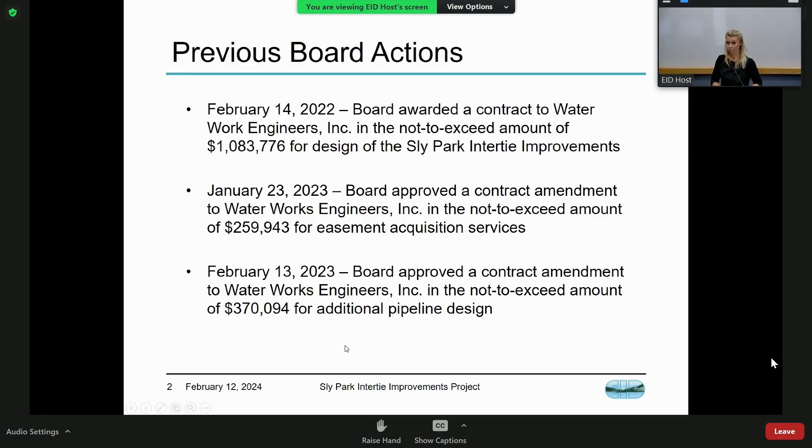Next slide. In April of last year, the board approved another contract amendment for additional geotechnical investigations as well as topographic surveys. The reason for this amendment was initially we were hoping to go right in the exact same trench, replace exactly where it was. Unfortunately, we had to modify the pipe alignment slightly, so those services were needed to facilitate the design.

And then in October of last year, the board adopted the capital improvement plan, which included this project. Summary of issues: we are getting close to the end of design for this project, about 95%, so we just have a little way to go. Additional engineering services are needed to get to those final stages. Also, staff is requesting additional funding for easement acquisitions as well as capitalized labor to finalize the design and carry the project into bidding.

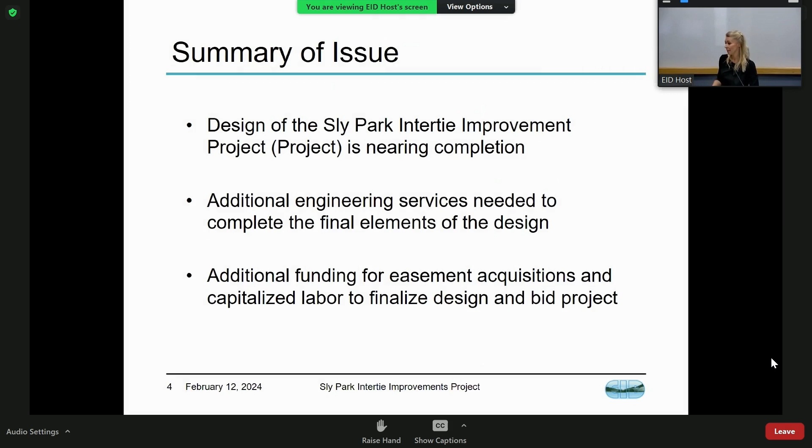Next slide, background - this is a refresher for most of you. Sly Park Intertie was originally constructed in 1978 to alleviate water shortages from the 70s drought. Initially, that steel pipeline was installed from Reservoir 1 to Reservoir A, and then the pump station was constructed in '93 in response to the Cleveland fire so we could put water from Res A up to Res 1, creating that bidirectional flow. Unfortunately, due to the emergency nature of the pipe construction, this is non-standard pipe, and it had to be taken out of service about 10 years ago due to leaks and pipe failures.

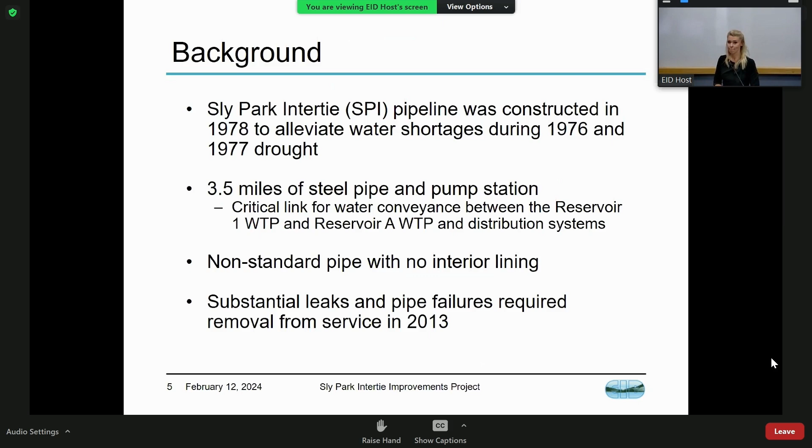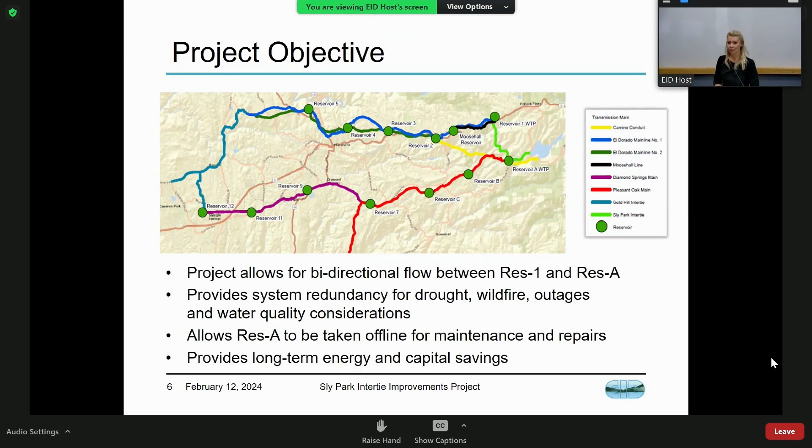The overall project objective is to reinstate bidirectional flow between our two reservoirs, Reservoir 1 and Reservoir A. This pipeline will provide system redundancies for drought, wildfire such as Caldor Fire, outages, and water quality considerations. This also allows Reservoir A to be taken offline for maintenance and repairs, which unfortunately we don't quite have right now. This also provides long-term energy and capital savings.

This screenshot is just an overall view of our pipe alignment. Above Highway 50, we start at Pony Express. That was the additional... excuse me? Oh, perfect. Great, thank you Jennifer.

The pipeline starts on Pony Express, north of Highway 50, comes along underneath the highway, traverses over 24 properties cross-country, over a few grade changes, I'll just put it that way, continues on to Reservoir A, and then we also have a slight leg down at the bottom. That's the slip lining for Sly Park Hills.

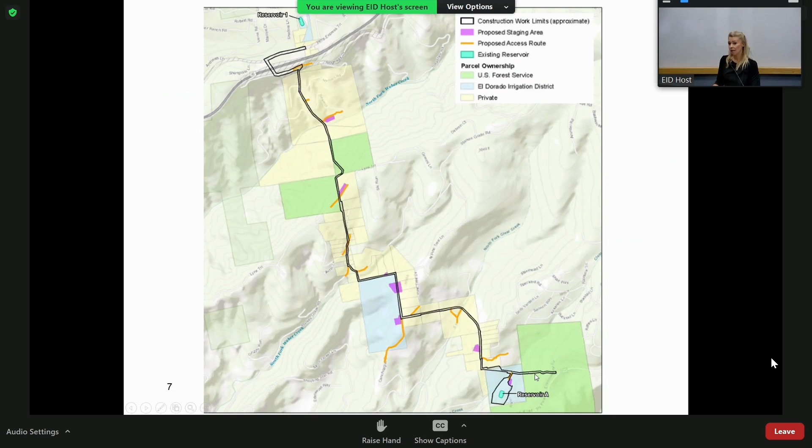Staff is requesting a contract amendment for additional engineering services. Some of those services include thrust block design. We typically have our standard thrust block design, and it takes quite a bit of footprint. Unfortunately, with the terrain and our easements, we'll need to do some specialty thrust block design to accommodate those space considerations. Also, we'll need a second Caltrans encroachment permit.

The initial alignment had a more direct shot underneath the highway. During design, we looked at potentially reinstating that, but it's not underneath any roadway or anything that we can maintain, so we decided to loop around and go under Ridgeway Drive. So we'll need a second encroachment permit so that we can properly abandon the existing pipeline.

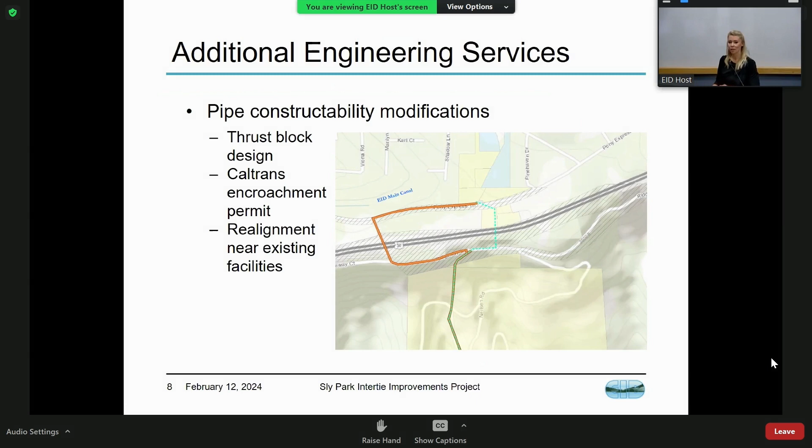Also, we did need to realign the pipeline in consideration of existing facilities. We do have some septic leach lines that we want to make sure we have proper clearance from. We'll have some modifications, called out in the presentation, about how the traditional method won't work, so we need to redesign those.

Can you explain that a little bit? Yeah, absolutely. So the pipeline itself is restrained. We do have excessive pressures and excessive grade changes. As a district, we typically have a more belt-and-suspenders way of designing our pipelines, and we have restraints as well as thrust blocks to make sure we don't have any unfortunate incidents in the field.

Our typical thrust block design is pretty much a large chunk of concrete that pushes against the soil so that if there's any pushing and pulling against those gaskets, it'll stop right there at that concrete block. We just don't have the space with the elevation and the easements to accommodate that large footprint of concrete block, about the size of a small vehicle. So we'll need to do some specialty design with steel reinforcement to try to get that same thrust constraint, but in a smaller footprint.

Alright, we'll also have some modifications at Reservoir A. Right now we have auxiliary fuel tanks for our existing generators, and we want that same functionality here. Unfortunately, this is a facility that we have power outages as well as pretty intense winter storms, so that emergency fuel storage will give us about 3 days of operation at the pump station.

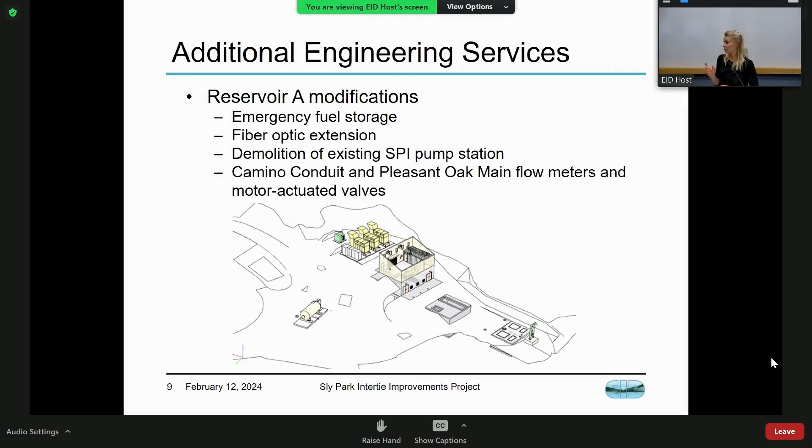Also, we will be extending the fiber optic line from the existing Sly Park Intertie pump station to the new location. We'll be demolishing the existing SPI pump station, giving us the ability to repurpose that building, so might as well take advantage of the facilities we have. Also adding flow meters and motor actuated valves to the Camino conduit and Pleasant Oak Main. This will help with our water reporting and water loss, to refine our numbers leaving Reservoir A.

And lastly, engineering services - we are looking to pre-purchase some of the long lead time items: generators, MCCs, motor control, as well as programmable logic control equipment.

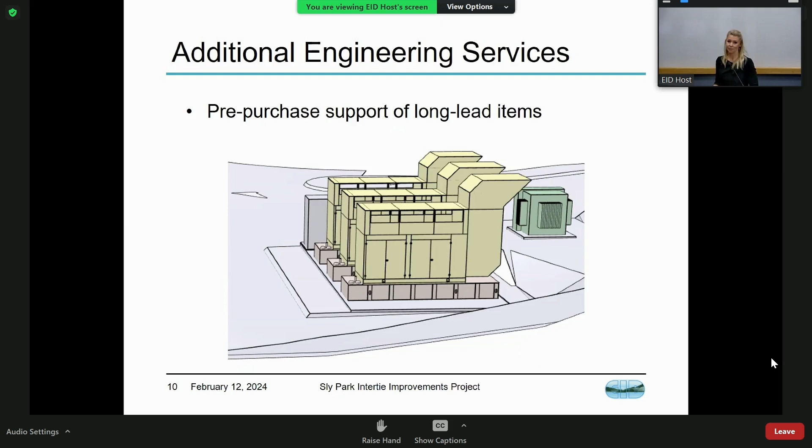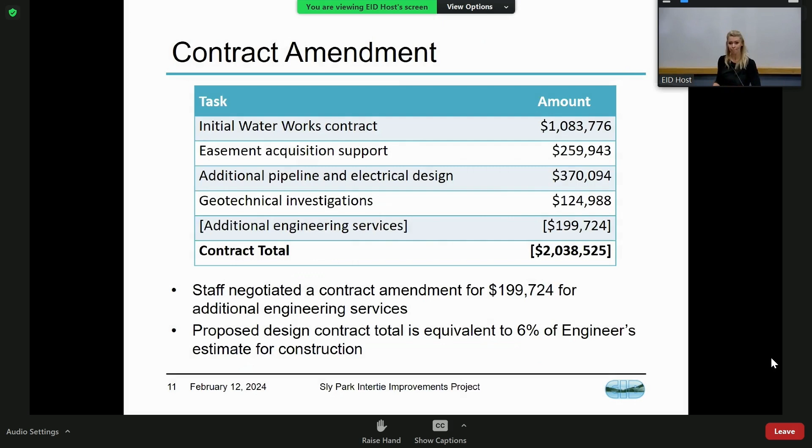Staff as well as Bender Rosenthal is progressing with easement agreement negotiations. These are conditioned upon the completion of the environmental review. So these are just agreements to eventually record easements for temporary construction as well as augmented permanent easements. This compensation will need to be placed in escrow, which is why I'm here today. And then the easements will be recorded and compensation will be released if construction is authorized by the board.

Difficulties with any of the property owners? We've had some very great discussions, I'll just say that. We're progressing through and trying to be very open and transparent with the homeowners. There are some concerns. We are not the only utility going through the area, so we get a lot of questions like, we've seen these types of terms with other agencies, can we match that? Elizabeth Leeper and I have been working together to try to be very fair, equitable, and transparent as we're working through that. I think we're making some good headway, and we'll be able to sign all of those agreements within the next couple of weeks.

So today's funding request: staff is requesting $199,724 for the Water Works contract amendment, about $200,000 for easement acquisition compensation, and $75,000 for capitalized labor, for a total funding request of $474,724.

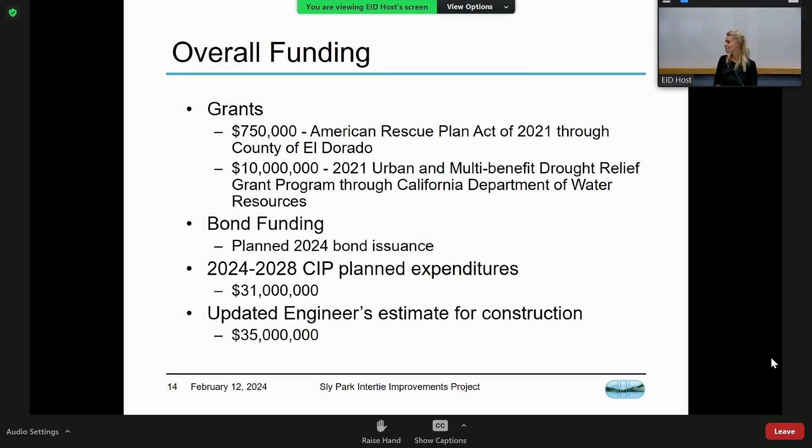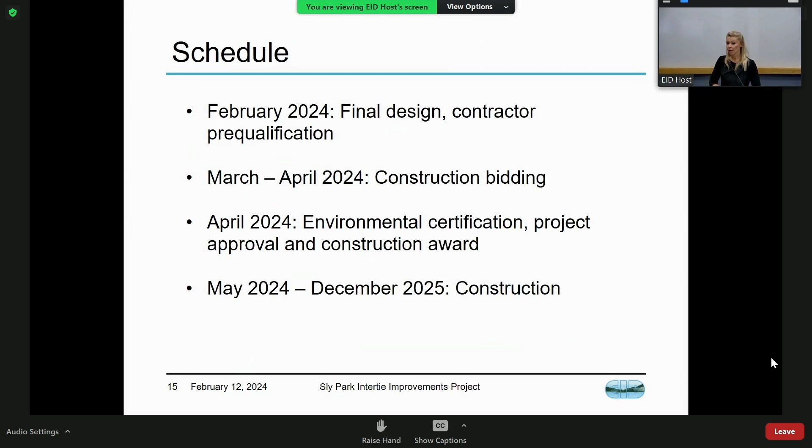Board options. Option 1: approve a contract amendment to Water Works Engineers in the not-to-exceed amount of $199,724 for additional engineering services, and authorize additional funding in the amounts of $200,000 for land acquisitions and $75,000 for capitalized labor, for a total funding request of $474,724 for the Sly Park Intertie Improvements Project, project number 21079. Staff's recommendation is option 1.